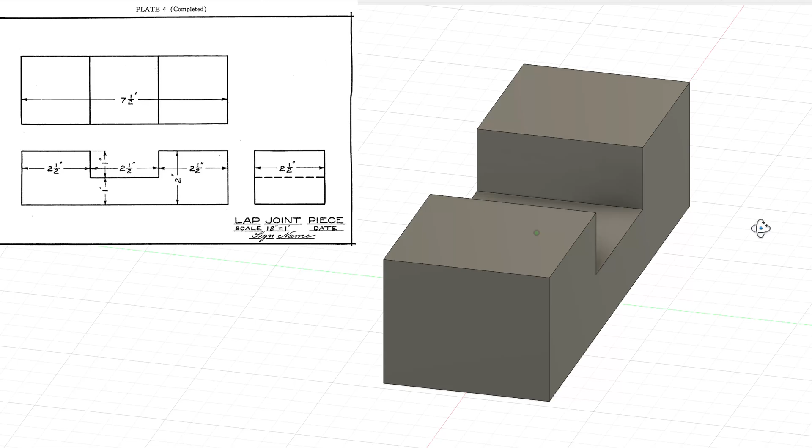This Autodesk Fusion tutorial is part of a series of mechanical drawing exercises for Fusion. This series is going to look at simple third-angle projections from a mechanical drawing problems textbook and then model them in Fusion. This is the first and most simple drawing that we're going to use, and each of the drawings will become more complex and explore new techniques within Fusion.

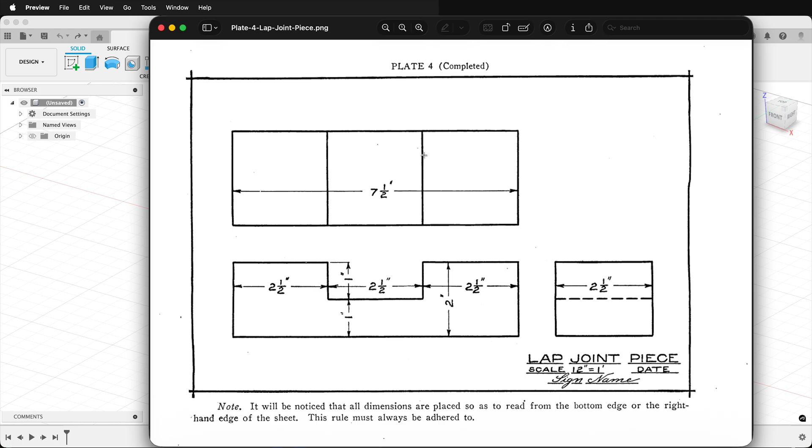This drawing here shows a lap joint piece, and it has a top view, a front view, and a side view. We need to decide which view is the best to use for our drawing. We could use any of these views and get to the desired effect, but I think starting with making a sketch from the top view is going to be the easiest. I'll go ahead and create a sketch, select the ground plane.

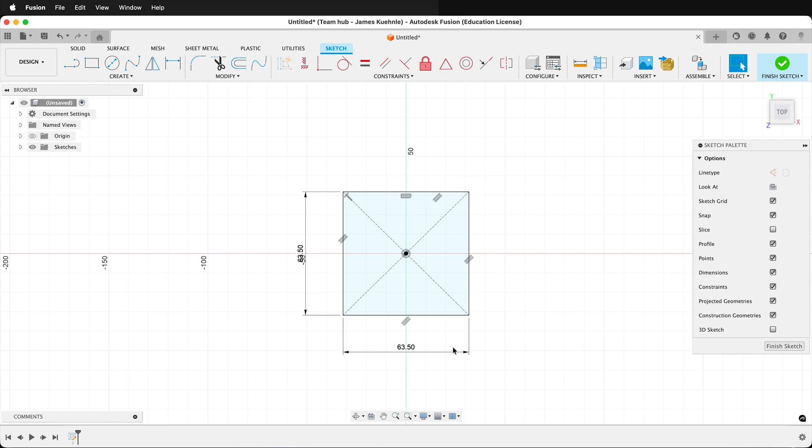In the sketch menu in Fusion, select Create, Rectangle, Center Rectangle. Click on the origin and then drag out. I can type 2.5 IN, then press Tab, and then 2.5 IN. Now I have a rectangle that is 2.5 inches. I need to draw two more rectangles, so I can click this rectangle here or press R, draw out, and now I have two rectangles.

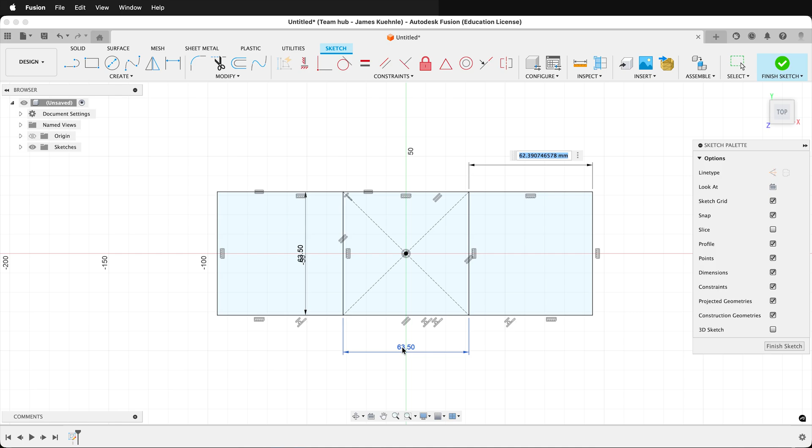Select the collinear constraint, select this line, and now these are collinear, and then select this line and this line. I can either type in dimensions, or I can use the equal constraint. For this one, I'll select this line here and make those equal. I'll show you another way that you can dimension things. By pressing D, I can select this line, click for the dimension, and then select an already existing dimension. That way, it is driven by this dimension. Now I can finish the sketch.

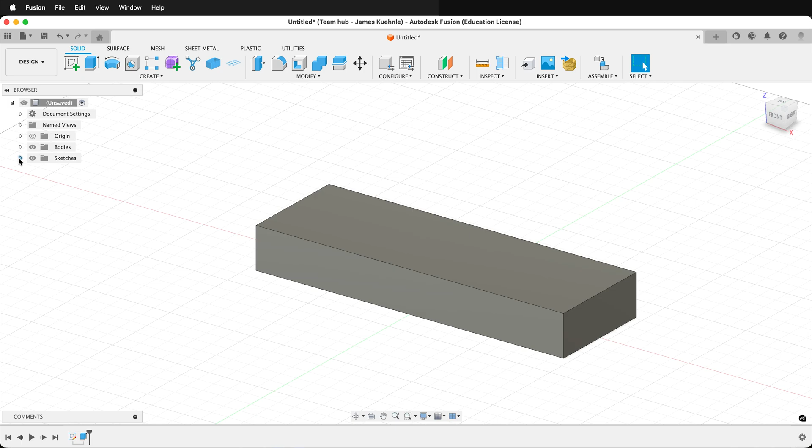Next, let's extrude. And if we look at the drawing, we know that we need to go up 1 inch on the sides. So I'll press E, select this face, and this face, and type 1 inch. So this gets part of our lap joint piece. Fusion always hides your sketch after you do an action. So over in the browser, select Sketches, and then click on this eyeball.

Next, we need to have the two pieces on the edges extruded up. Press E, and in Fusion, if you can't select the object, click the left mouse button, hold, then you can select Profile, click the left mouse button, hold, select Profile. And we don't want to extrude from here, because watch, if I type in 1 inch, it's going to try to cut this in half.

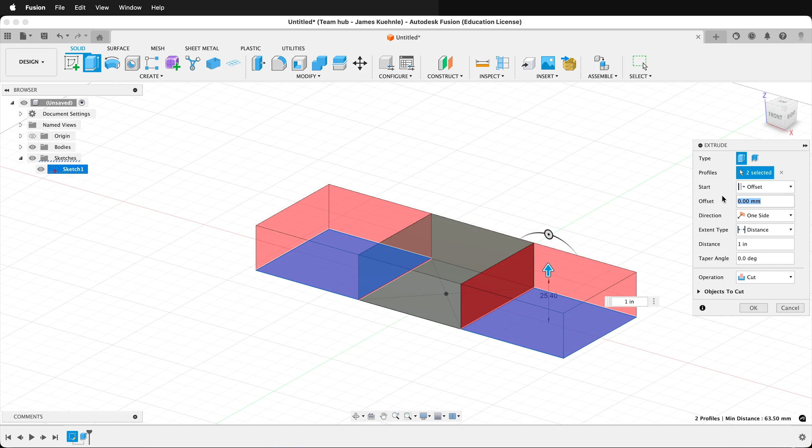I want to set an offset. So instead of the profile plane where the sketch is, I can click Start, Offset, and then the offset will be 1 inch. The operation will be join, and I'll press OK. Now I can hide the sketch.

Here we've taken a simple third angle projection from a mechanical drawing problems textbook, and then used those sketches to precisely make this model in Fusion.